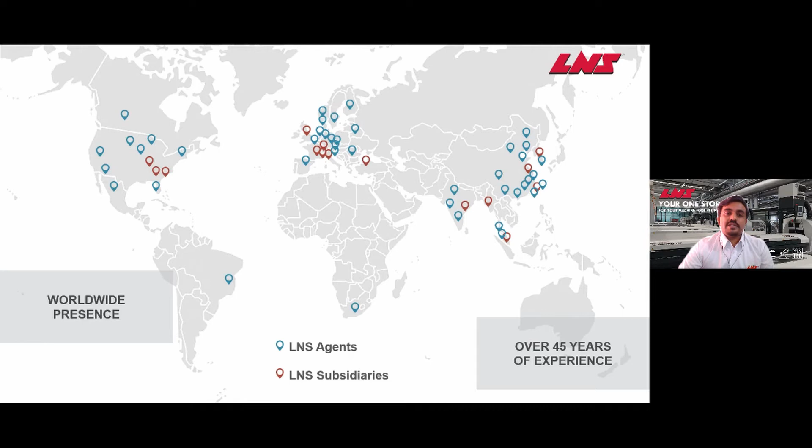LNS established in 1973 in Jura, Bernois, Switzerland, the home of watchmaking. Over 45 years of experience, we have a worldwide presence of sales and service networks. We have 9 manufacturing facilities, all ISO 9001 certified. 3 manufacturing facilities are in North America, 3 in Europe, and 3 in Asia.

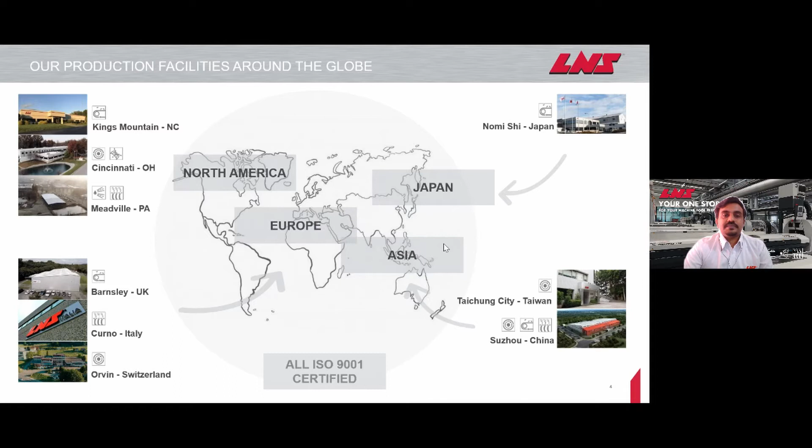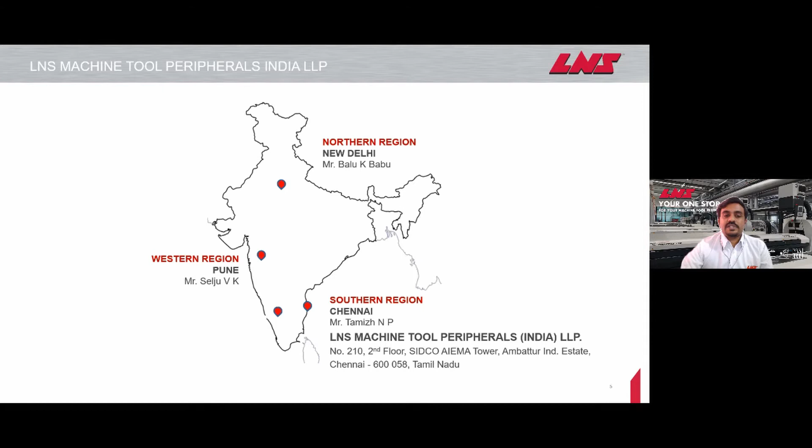LNS Machine Tool Peripherals India LLP, our main head office, is situated in Chennai. Mr. Tamizh is looking after the Chennai region. We will be giving support, spare part support, and sales support from this office. Mr. Balu is looking after the northern region, sitting in Delhi. Myself, Selju, looking after the western region, sitting in Pune. Mr. Shaji is looking after all over India customer support and OEM sales.

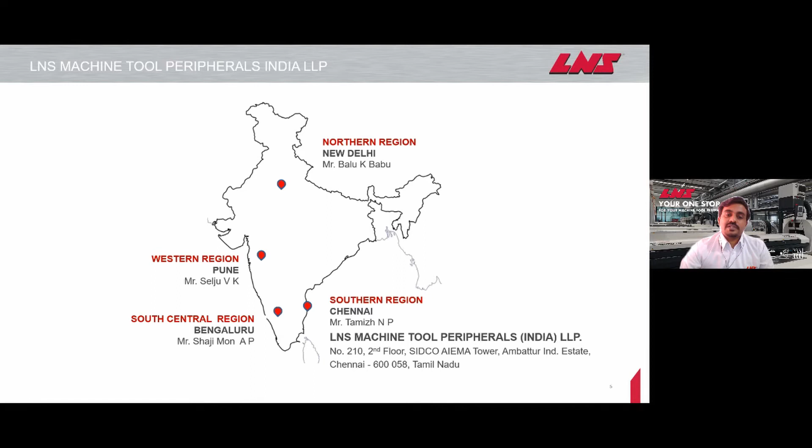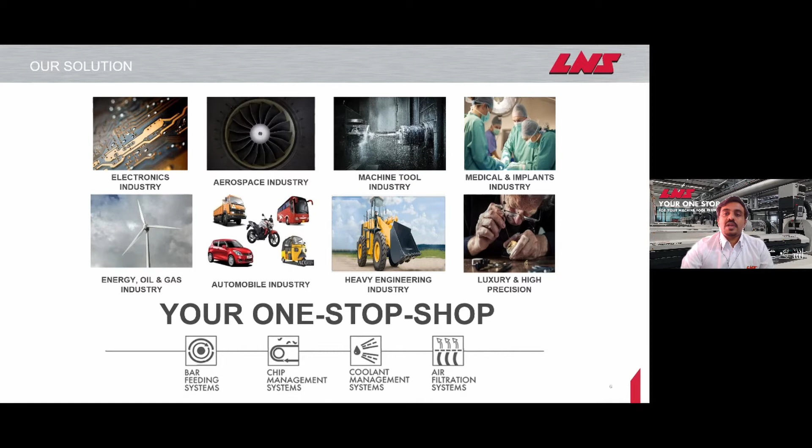LNS is providing one-stop shop solutions for every machine tool industry, like electronics, aerospace, machine tool, medical implants, energy, automobile, etc.

Our mission and vision: LNS provides one-stop shop solutions for every machine tool industry, like bar feeders, high pressure cooling systems, air filtration systems, and chip conveyors. LNS vision is by 2022, LNS will be the global leader for providing one-stop solutions for machine tools. To succeed in this, we'll be providing the best-in-class service and products to our customers.

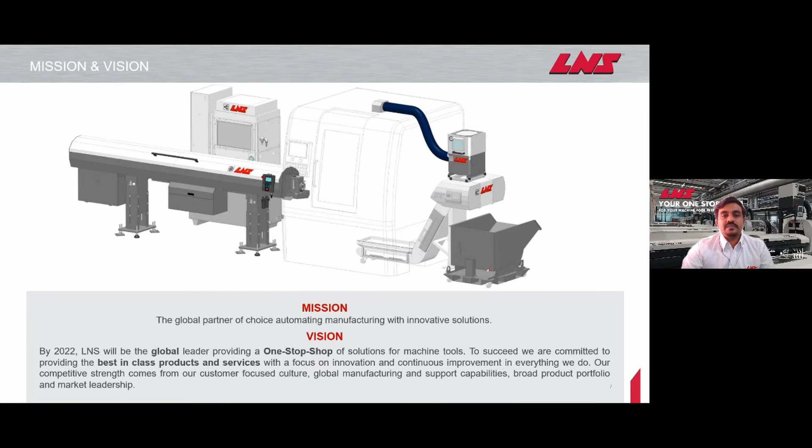LNS air filtration systems. Why are air filtration systems required in our factory? We all know when we are using oil-based coolant systems in our factory, there will be a lot of oil mist coming out of our machines. When we are breathing this kind of oil mist, what effects will it have on our body? A lot of negative influence it will create in our body.

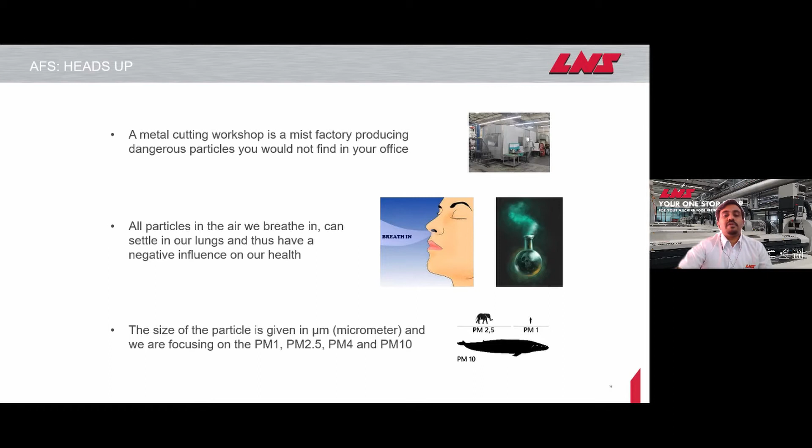We will discuss that. Whenever we are discussing about the particle sizes we are breathing, that will be mentioned as PM10, PM4, PM2.5 and PM1. This value is measured in micrometers. PM10 will be 10 micrometers. More than 10 micrometer particles will stay outside our body, and less than 10 micrometer down to 0.1 micrometer particles entering our body. 10 micrometer particles will be like fine dust, pollen, mold particles, and PM2.5 particles like combustion particles, asbestos, bacteria, and PM1 particles like soot particles and viruses.

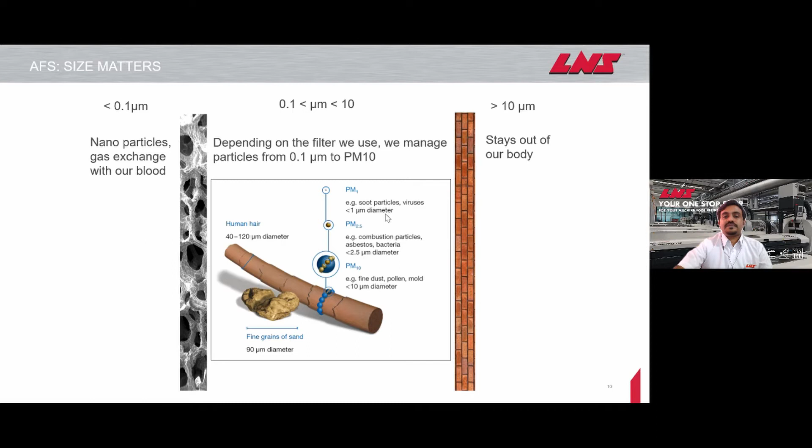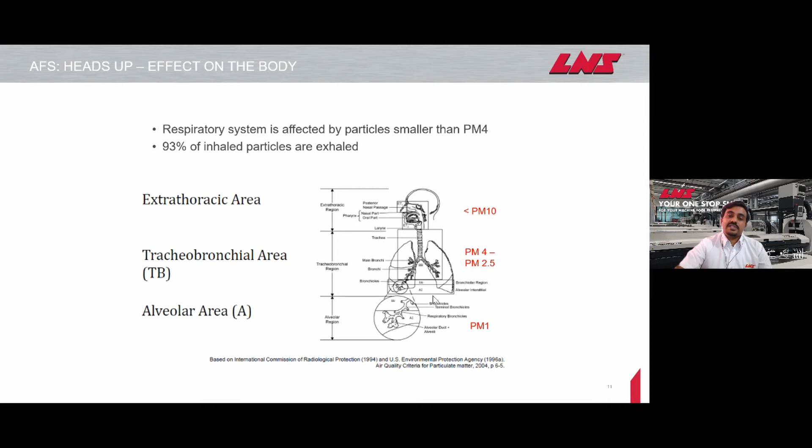So we can discuss what are the effects and what body parts will be affected by these particles. PM10 particles will enter our extrathoracic region, and particles up to PM4 will be filtered by our body itself. After that, smaller particles like PM4 to PM2.5 will enter our tracheobronchial area, that is our lungs area, and particles less than that, the PM1 component, will enter our alveolar area. These particles will affect our lungs, reduce our lung capacity, and create breathing issues.

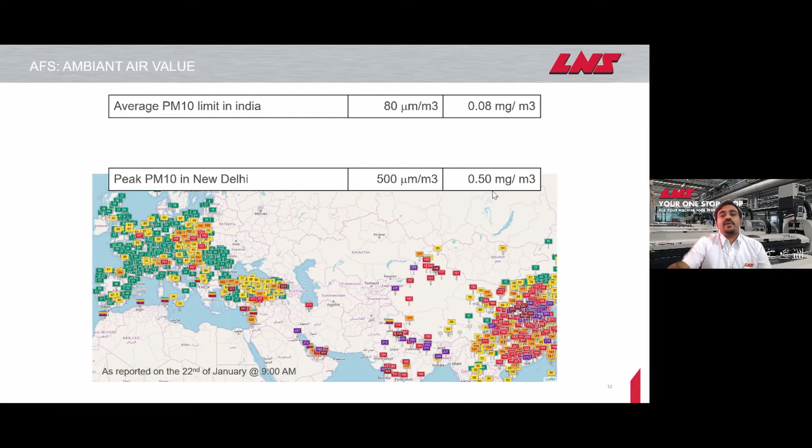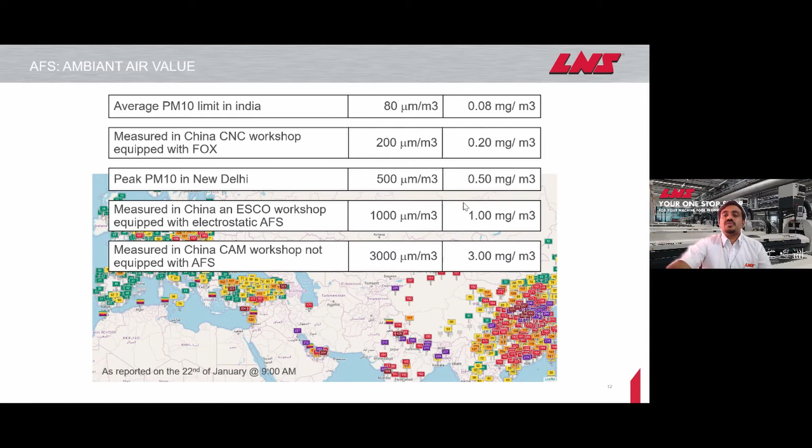When we discuss ambient air values, the average PM10 limit in India is 0.08 milligrams per cubic meter. The peak PM10 in New Delhi, as measured by Indian climate control, is 0.5 milligrams per cubic meter. And how about in our factories? We have taken tests in our China factories, and we got results of around 3 milligrams to 1 milligrams per cubic meter of particles in our factory.

So how can we reduce it, how can we breathe good air from this? That is what we are going to discuss.

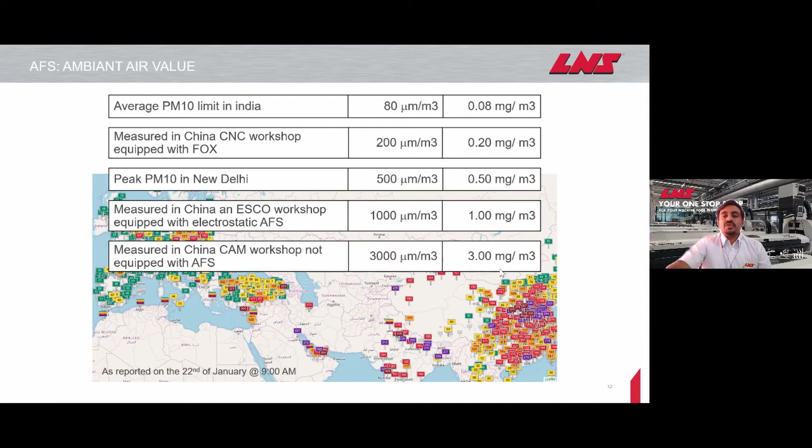Benefits of air filtration systems, as I discussed in the previous slide. First one is operator health. We can provide good breathing air to our operators by installing our air filtration systems.

Second one is clean air, clean factory atmosphere. Whenever oil mist comes out from the machine, it creates a lot of issues, like entering our electronic devices and damaging them, and settling on our machine surfaces and floor. So we can create a clean factory atmosphere by installing air filtration systems.

Third one is collects oil and drains it back to the machine for use. A lot of oil comes out from the machine, and it is actually very costly. Oil is getting very costly nowadays, so now we can reuse, take down and reuse the particles from the mist.

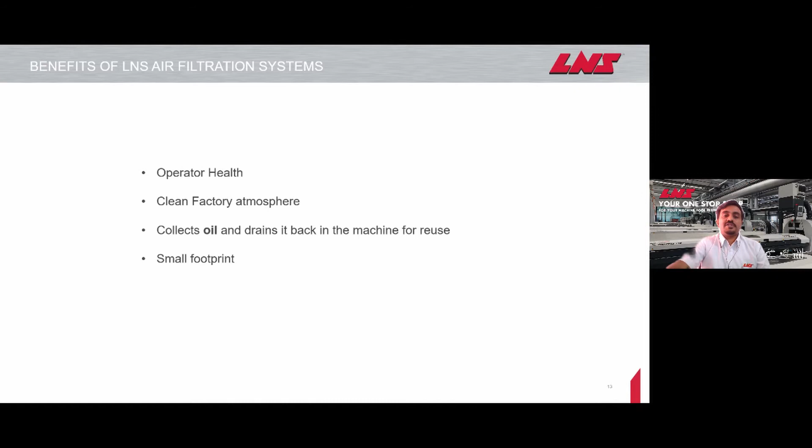The fourth one is small footprint. LNS air filtration systems are very simple and easy to mount on the machine. There won't be much space required for installing our filtration systems.

Now we can discuss the types of air filtration systems in LNS. We have two types: one is media filtration, and the second one is electrostatic type filtration. This is our new product we are launching in India.

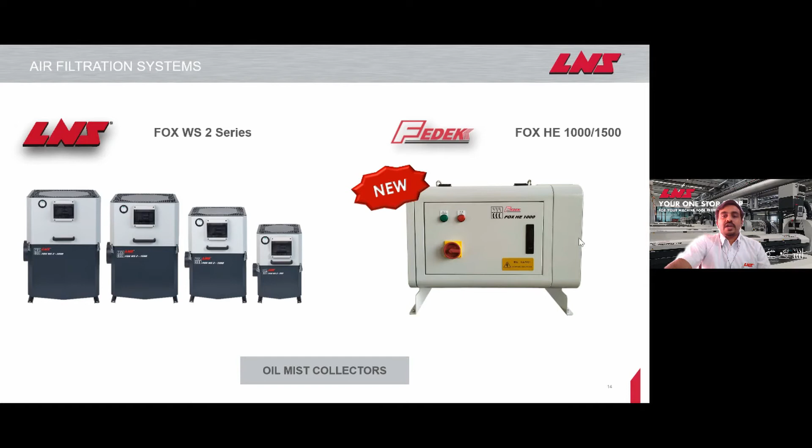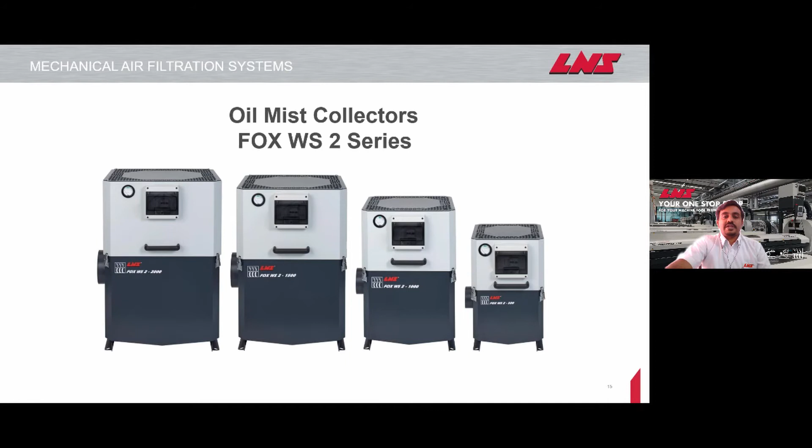LNS air filtration system, that is FOX WS 2 model, mechanical type filtration system. Main characteristics of our mechanical type filtration system are compact dimension, high reliability, easy maintenance, low energy consumption, and guaranteed filtration efficiency. We have three integrated filter stages combined into one, and by using a cartridge filter, we can give a larger filtration area compared to panel and bag filters.

And we have a light impeller, so there won't be any vibrations in our system. It is easy to maintain. There is one opening system, one opening door will be there. We can access our filters very easily, and we can change it or clean it very easily.

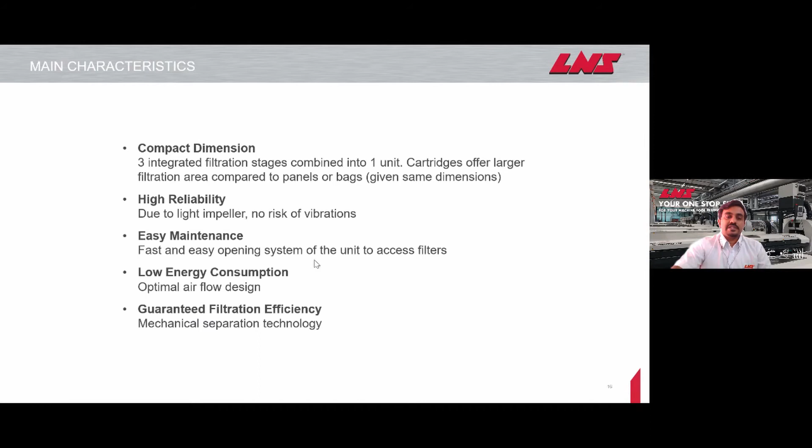Coming to our working principle of the mechanical type filtration system, there will be three stages of filtration. First stage will be initial or pre-filtration, composed of three different progressive filtration stages. We can filter almost 92% of oil mist in the initial stage itself.

The second stage will be intermediate filter, that is a centrifugal type filtration. A special impeller is used for the centrifugal effect, and that enables continuous discharge of the recondensed particles. And the third one is final filtration, that is extended filtration, where we use fiberglass filters, and we can achieve up to 99% efficiency here.

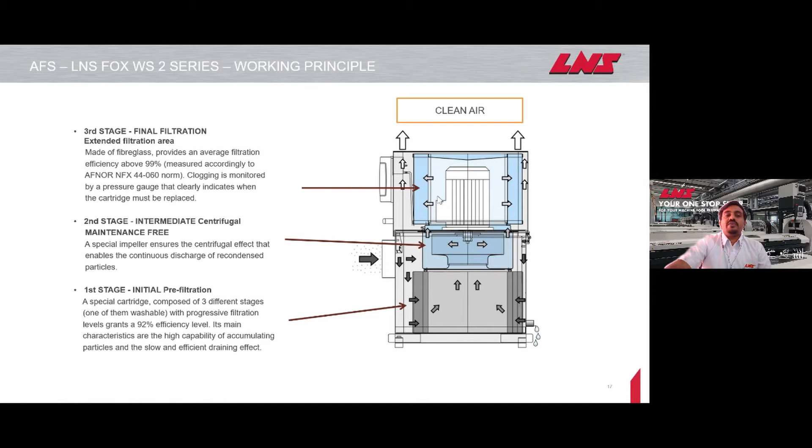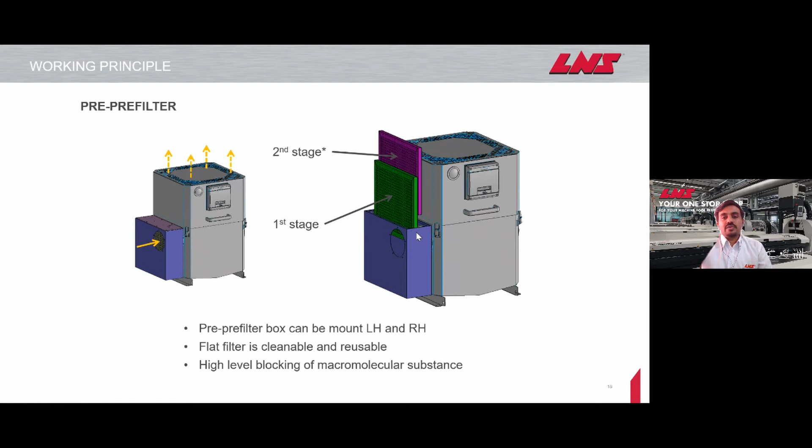Now we are coming to electrostatic filtration systems. We can use electrostatic filtration only in oil-based coolant machining. We cannot use it in some situations like machining with water-based coolant, machining with plenty of dust like grinding or polishing, and machining with organic solvents such as gasoline, benzene, kerosene, alcohols, etc., flammable gases, and corrosives. In these conditions, we cannot use our electrostatic air filtration systems.

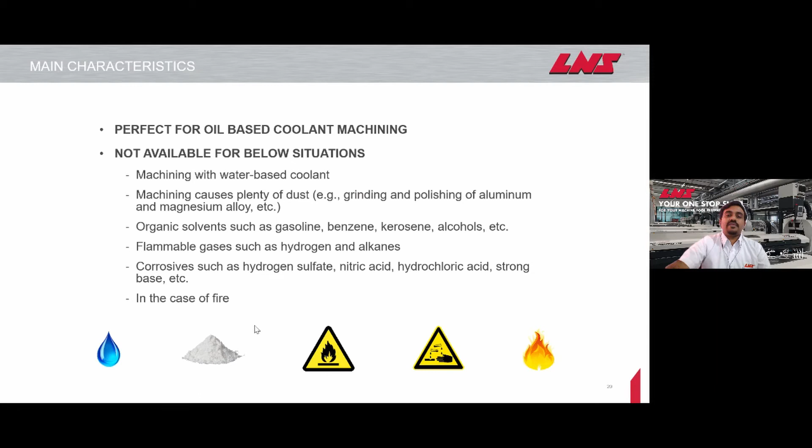Now we are going to see our working principle. There are two stages of filtration. First stage will be pre-filter, that is like a mechanical filtration before it. You will clear out the fine chips and the rough oil mist here.

And the second stage is the major stage of electrostatic filtration. Whenever the particles enter into this highly charged electrostatic area, these particles will be charged to positive and negative. We have collection plates, positive and negative plates, and negative particles will be collected by positive plates, and positive particles will be collected by negative plates, and the clean air will be going out.

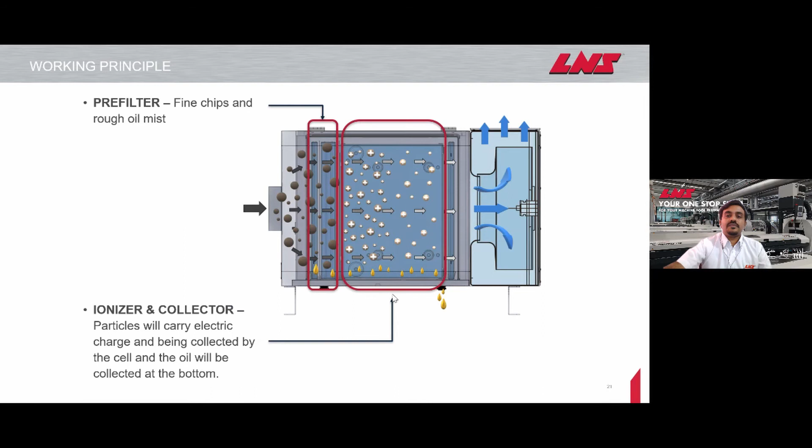We have a post filter option also. By this, we can achieve 99.95% filtration. Also, we can connect a connecting plate. If it is a closed space, this emitted air we can collect to outside. We can able to do that.

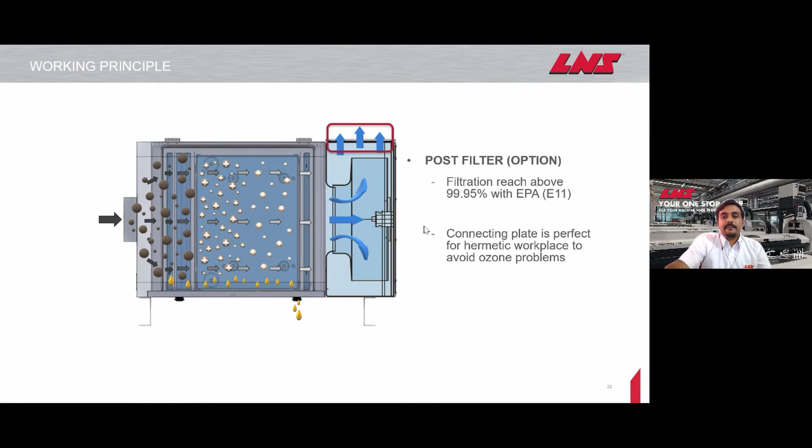Main characteristics of electrostatic filtration: First, LNS air filtration systems is specially designed with an assembled cell, and it is repairable instead of replacing a new one. Filtration efficiency can be reached up to 99%. For example, if oil mist concentration of emission is 20,000 micrograms per cubic meter, by using LNS electrostatic air filtration systems, we can reduce it to 260 micrograms per cubic meter. Compared to the competitor, it is around 460 micrograms per cubic meter.

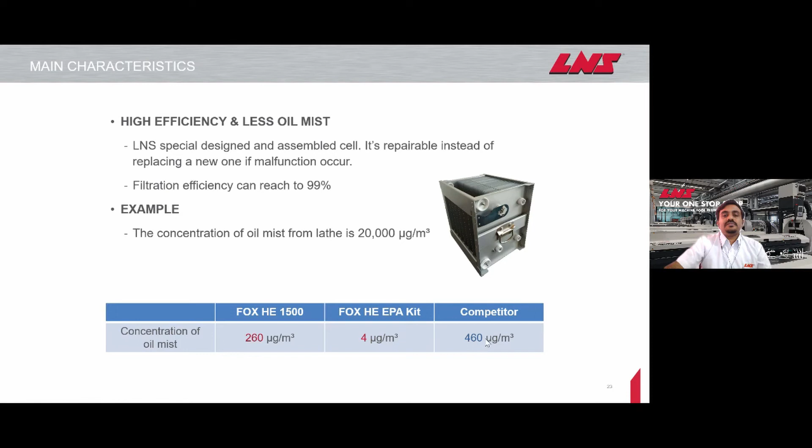We have two doors in our system for easy maintenance. The first main door, we can access the filters, pre-filters and the cell, and the second one is the electrical cabinet, equipped with a safety switch.

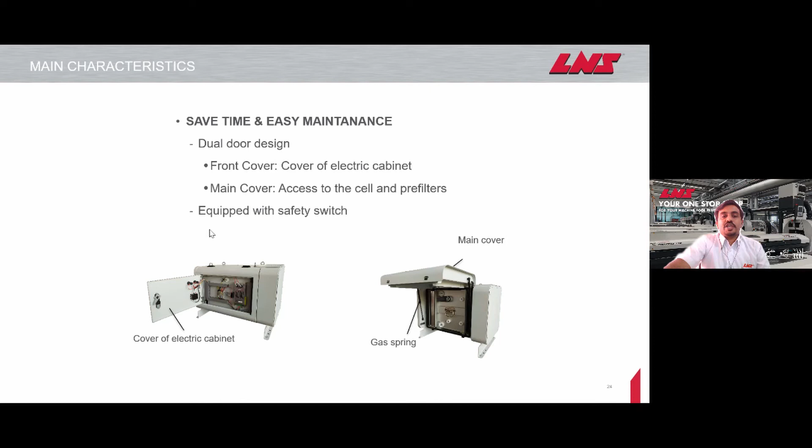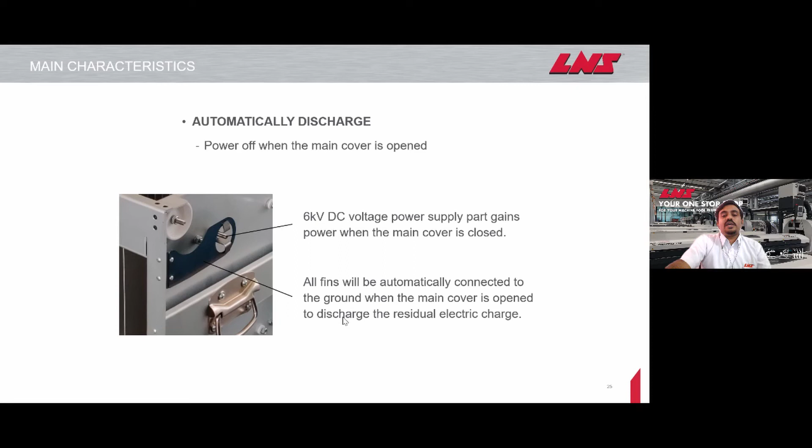We have an automatic discharge option. We are connected with a 6 kilovolt DC voltage when the main door is closed. When we open the main cover, all fins will be connected directly to the ground, and it will discharge immediately within 20 seconds.

Compared to our competitors, for easy installation, LNS FOX filtration systems HE systems are very lightweight. LNS FOX HE1000 is 49 kg, LNS FOX HE1500 is around 79 kg, and the cell weight is 8 kg in the FOX 1000 and 12 kg in the 1500.

In our system, we have a wireless connection cell. It is easy to maintain, easy to take out the cell from the filtration system, clean it and put it back. Compared to competitors, who have a cable connection, it will be lower safety and difficult to maintain.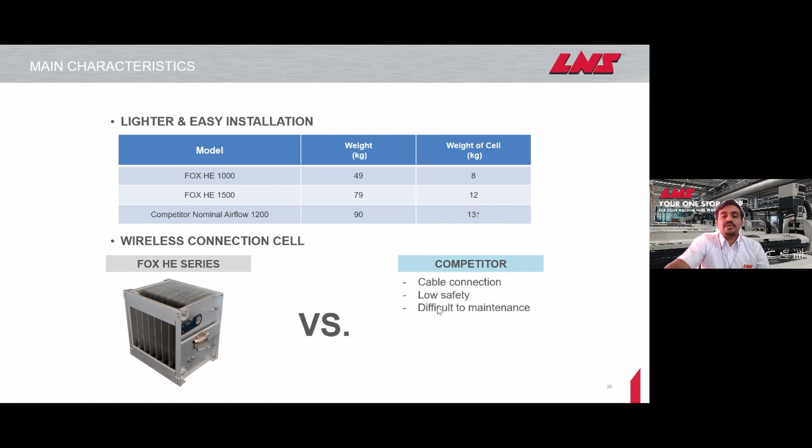We can compare now. We have seen two types of filtration system: one is media filtration, one is electrostatic filtration. Now we can compare both. In media filtration, the filter pores are used for filtration of particles, so whenever the filter gets clogged, the filtration efficiency decreases.

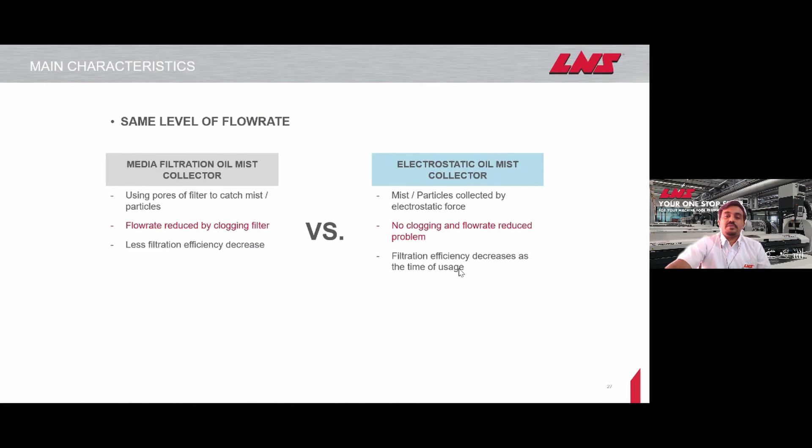In case of electrostatic filtration, the mist and particles are collected by electrostatic force, so there won't be any clogging or flow rate reduction problem because of clogging. Filtration efficiency will decrease after some time of usage, maybe the cell.

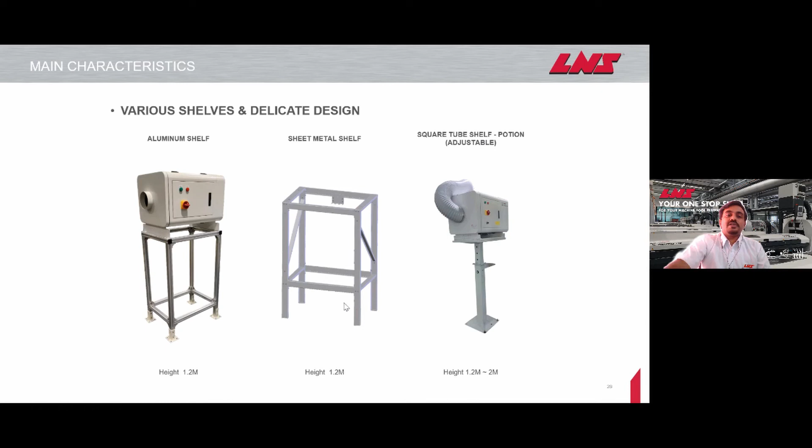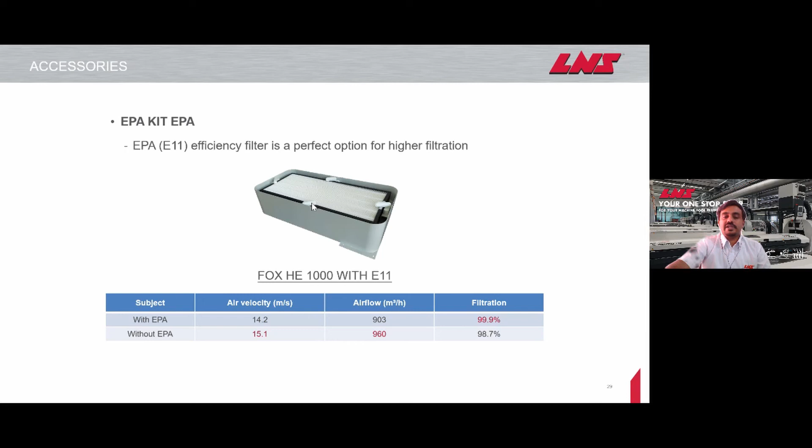For installation, we have different types of stands available in our product range. As I said, we also have one more option with an EPA kit, like a high efficiency filter for 99.9% efficiency filtration. We can also have a connecting plate to connect things, the duct filter, via a central collection unit.

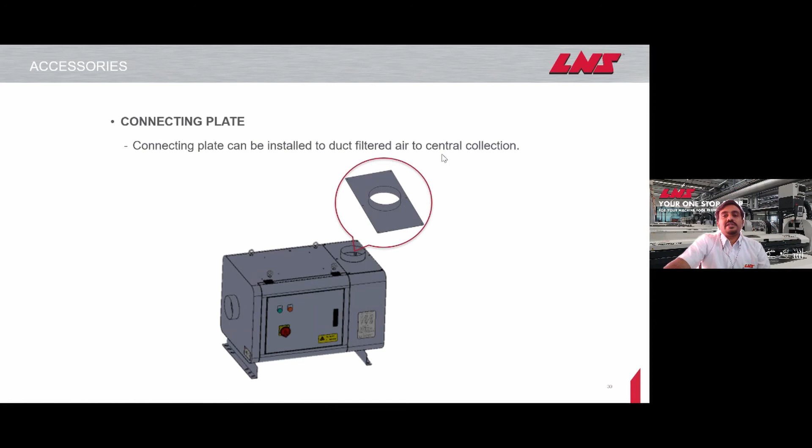Technical data of our air filtration systems: Fox HE1000 has 1100 cubic meters per hour at 0 Pascal, that is the airflow. In the HE1500, it is 1500 cubic meters per hour at 0 Pascal. Weight is 49 kg for HE1000, 79 kg for HE1500. Current rating is 0.87 ampere, and in HE1500, 1.2 ampere. Sound rate level is 67 decibels, and here also 67 decibels.

And filtration rate is 98.3% in HE1000, and in HE1500, 98.7%.

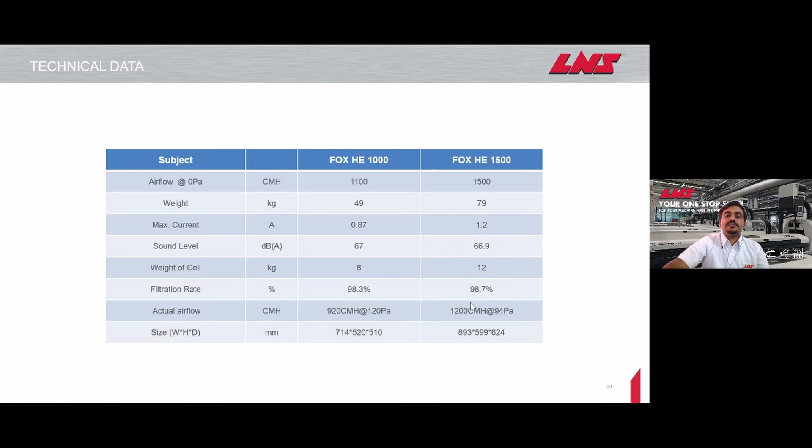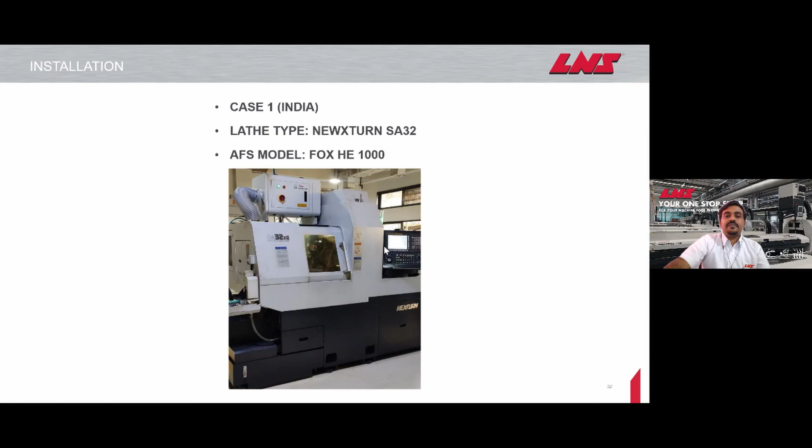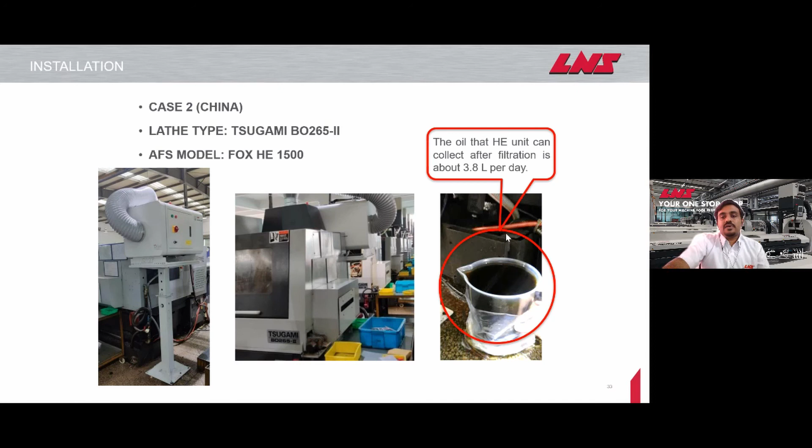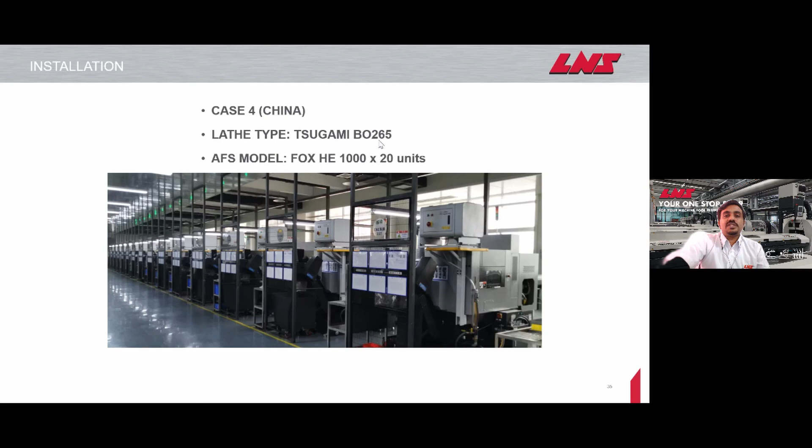Fourth case is also from China, BO265 machine, 20 units installed. This is Citizen A20 from Malaysia, Fox HE1000, 4 units with a bar feeder and chip conveyor.

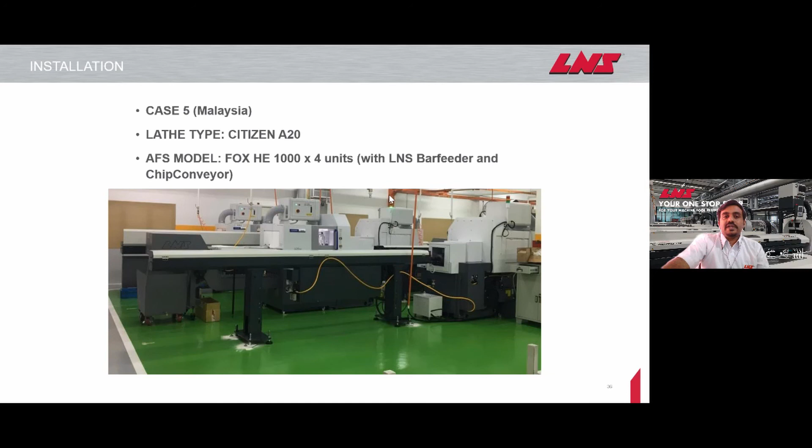One question I received from Shivaji Apke: is it micrograms or milligrams? It is micrograms. The particle size is in micrometers. Thank you, everyone.